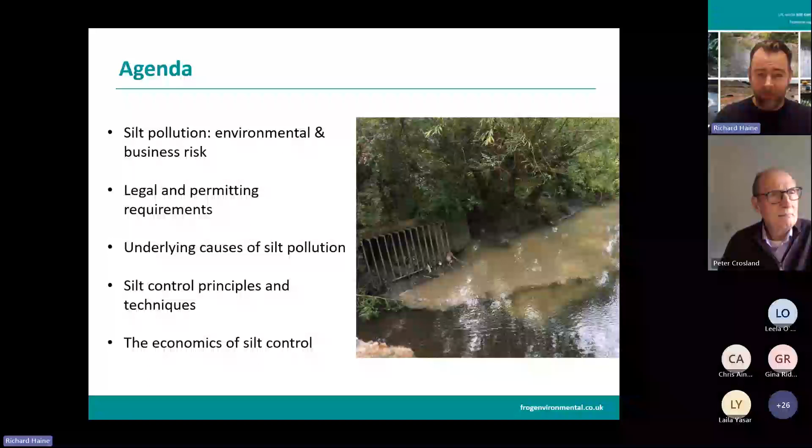So the agenda today: we'll look at some of the environmental impacts and the business risk of silt pollution, think about the legal and permitting requirements, try and get into the underlying causes of silt pollution, because getting down to the underlying cause can help us solve those problems. We'll go on to look at some principles and techniques, and we're actually going to touch on the economics of silt control as well today. Before we get going, a quick introduction about Frog Environmental.

We are silt control specialists. We design, manufacture and distribute silt control equipment, and we support many different types of businesses and contractors on site with their technical problems. We also design and deliver bubble curtains, which can be used for silt control as well, but also have a range of applications in marine and inshore environments, including things like sound attenuation.

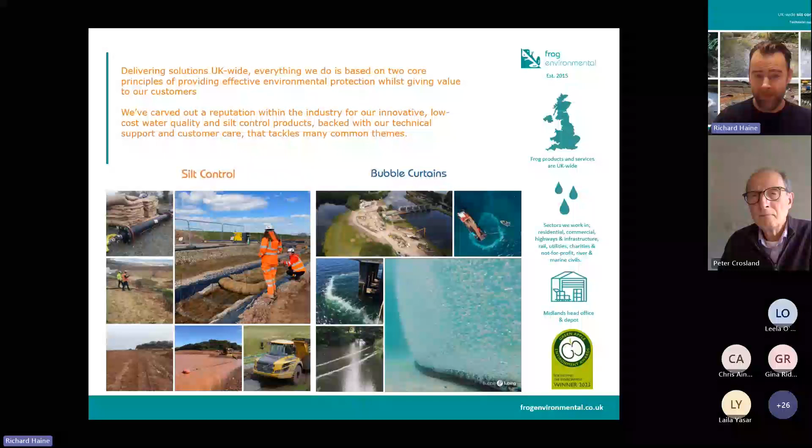A couple of key themes that we're going to touch on today. First of all, silt is a damaging pollutant to the environment. Your site needs to be ready year round, it's not just a winter problem. So we do talk about being rain ready, having a site that's ready for that summer deluge as well as the winter deluge. We do see some really bad silt pollution events happen in the summer.

Most of the silt pollution events we see on site are actually avoidable. So there is hope, but you do need good planning to get it right. And that's going to be another theme that's going to come up again and again, that planning aspect.

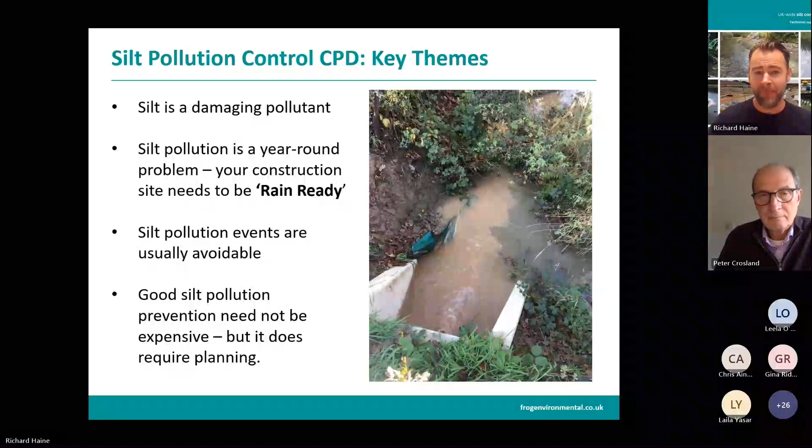So first of all, why do we need to prevent silt pollution? There's a few good reasons. First of all, we're responsible people working for responsible companies or organizations. We want to prevent environmental damage. We want to make sure our site is legally compliant, and in doing so, reduce that business risk. And also, when we're doing anything on site, ultimately we want to look for efficiencies and reduce costs as far as practicable.

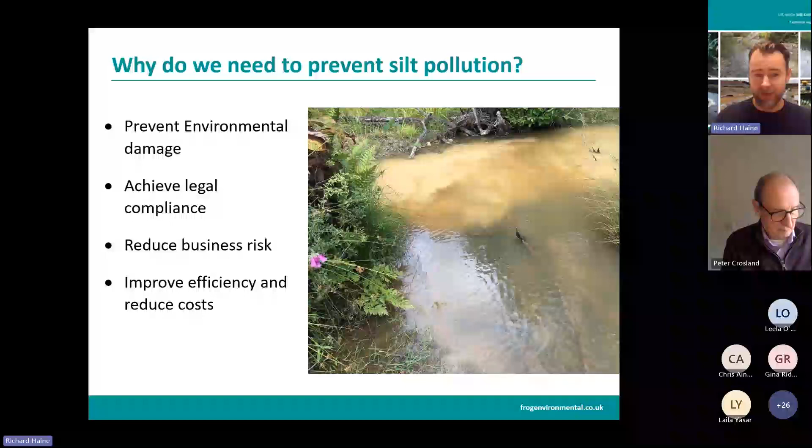Just before we get into the nuts and bolts of it, it's worth putting a definition on silt pollution, because silt is a naturally occurring part of any fluvial or river system. Obviously it's from weathering of rock, bedload transport. So when we're talking about silt pollution specifically, we're talking about silt entering a river or water body typically that shouldn't be there, from an anthropogenic source such as mining or a construction site, or indeed remobilizing silt in an unnatural way that might already be in a river system that could cause a knock-on effect downstream.

So let's look at those environmental impacts for a second. Habitat degradation is pretty well understood - large loading of silt can really reduce spawning ground for fish. It can have an impact on the aquatic food chain. It's also a vehicle for pollutants entering the water, including things like higher nutrient loads that might have more acute impacts, introducing a higher biological oxygen demand into the waterway for instance. And it could have chronic impacts as well - things you might not want in a river, like heavy metals that can end up attached to that silt.

We're also seeing it cited a lot in terms of increased flood risks, particularly where we're seeing large construction sites upstream of flood control structures.

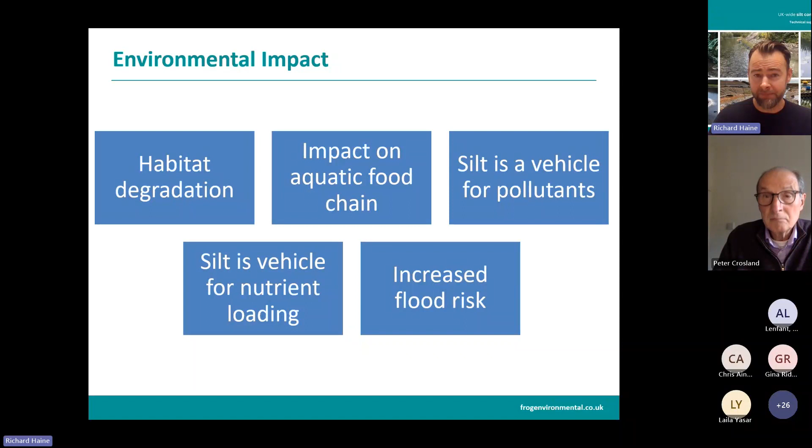Business impacts are a bit more dynamic. Certainly enforcement actions and fines is a pretty obvious one. If you do cause an incident, you're going to have to respond to it, so there's some hidden costs there as well. Those hidden costs get to the surface pretty clearly if your site is put on stop, and we do see that, unfortunately, sites stopped in their tracks. That can start getting very expensive if you need to stop working completely while you get your act together. And if you really cause a big problem, you could have cleanup costs.

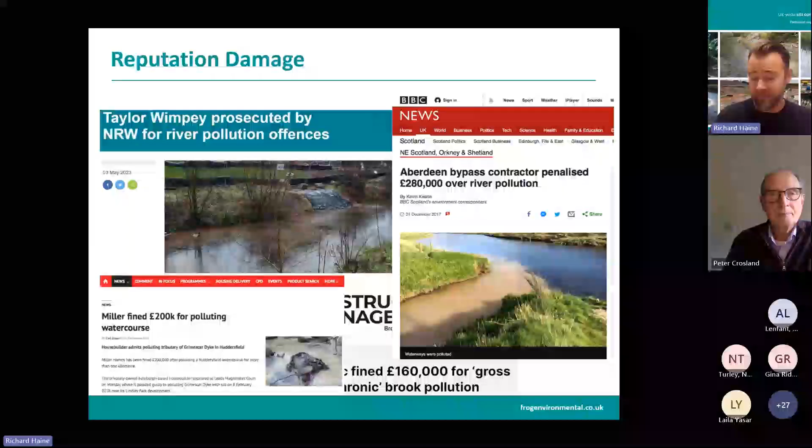Responsible people, we've got to comply with all the relevant legislation. Now there's lots of different legislation here - I'm not going to go through it all, but none of that will cite silt specifically. But if you do cause a silt pollution event, there's lots of different regulatory instruments you could be prosecuted under, including things like the Environmental Permitting Regs, the Environment Act, Freshwater Fisheries Act. It all depends on what you've damaged and how badly you've damaged it.

Bit of myth busting for you here. Something we do hear quite a lot on site is that because a site's got its plan in place, they've got their drainage design, it's all been signed off by the lead local flood authority, that they've got a permit to work, a permit to build. If you're on site anywhere 3 months - certainly in England and Wales, it's a bit different in Scotland - but if you're on site for 3 months or more, you will need a bespoke environmental permit to discharge water during your temporary works phase.

And that's perfectly logical, isn't it? Because when a scheme's finished, the actual environmental impacts, provided it's well designed and approved, are very low. But those environmental impacts during the temporary works phase are actually pretty significant when it comes to silt pollution and actually connecting a source to a receptor.

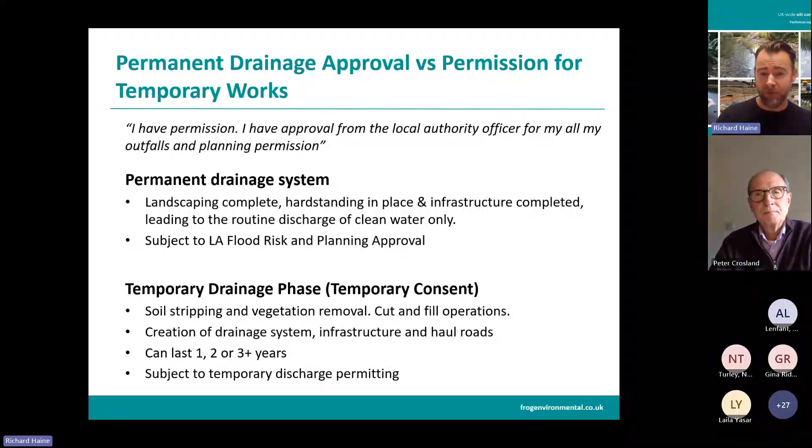There's been a consultation recently. The £250,000 cap is being removed, and that relates to the variable monetary penalties that are imposed directly. So that gives the regulators a way of fining a quicker method without having to go through those court costs, which can be very costly. Ultimately, all the regulators have got a budget that relates to being able to take people to court, but they've now got a better mechanism for fining people a bit more quickly and easily.

And we know that's going to come into play for silt pollution, because we are seeing some pretty big six-figure fines over the last 12 months.

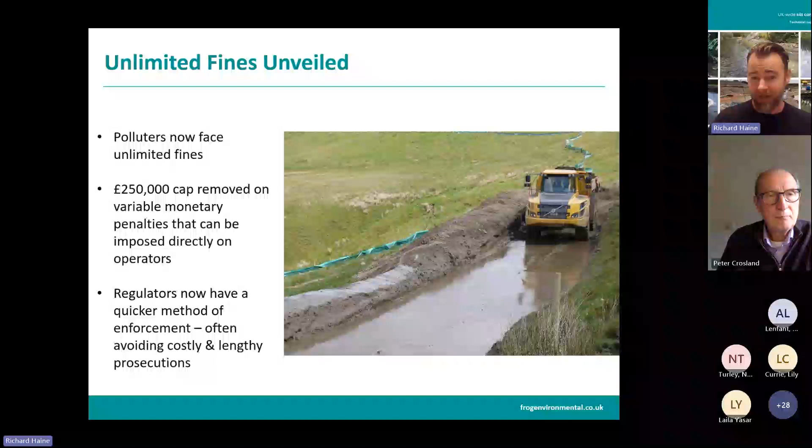And I know this is lots of information on this slide, but I think it's worth taking a step back and actually thinking about all those risks and what they are and the different drivers here. You know, we've got people who care about rivers.

Certainly, they're more in the news at the moment. Pollution has become higher profile. Probably the pandemic contributed to people enjoying the green and blue spaces on their doorstep a bit more. We see more volunteering, more citizen science taking place on rivers.

That's leading to more reporting to the regulators from members of the public. We're certainly seeing a changing regulatory attitude and legislation - more fines, more severe fines. We've got the prospect of climate change, more intensive rainfalls predicted. How's that going to impact how we manage surface water during temporary works?

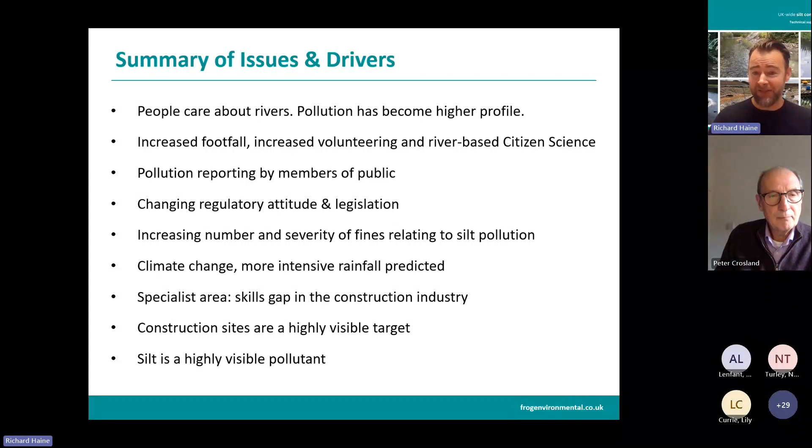There's a skills gap in the construction industry regarding silt control. It's quite a specialist area. Not many people are particularly good at it. Construction sites are also a very visible target. Adding to that, silt is a highly visible pollutant, and you've got a bit of a perfect storm there. I think ultimately that's why we're having discussions like this, CPD sessions like this, and that's kind of why it's moving up the agenda.

So we know silt causes environmental damage. We know the business risk is increasing, but we still see lots of silt pollution events happening. So from our perspective, it's worth asking why, because we do still see lots of silt pollution events. And to understand that, it's really worth thinking about those underlying causes.

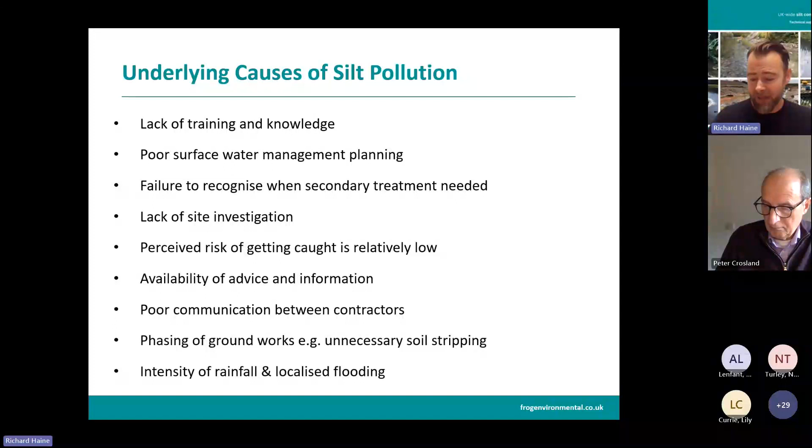And we deliver a whole module on this in our half-day training, because I think if you can get down to the underlying causes, you can come up with systematic and process-driven solutions rather than just sticking-plaster solutions. Now, I'm not going to run through these all at the moment, but I would just like to pick out a few of my favorites, if you will.

First of all, that lack of training and knowledge, that skills gap that I referred to earlier. There are people on site who don't understand that silt is a pollutant, and that's not good enough. They might understand that diesel or hydraulic oil or anything has to be stored in a certain way as a pollutant, but just getting that baseline of knowledge to everyone on site, making them understand silt is a pollutant - you need to report it, it needs to be managed.

The other aspect of this is that, from our anecdotal experience as practitioners, if we go to site to talk about silt pollution or help on a technical front, we could be talking to a project engineer, a site manager, project manager, an ecologist, various different roles, none of whom are silt control specialists. So there is a knowledge gap there.

And there's certainly different ways of approaching that. Sessions like this are really useful. More in-depth training can be done. At the other end of the scale, just a simple toolbox talk on site, perhaps, to tell people that silt's actually a pollutant, what to do, how to report it. These are all things that are going to contribute to building a slightly more resilient system.

Consider minimum standards for key roles. And I guess this comes down to the fact that this is a technical discipline in its own right. But it's not all that complex. And if you understand the principles and get that in place, then actually a lot of problems can be prevented.

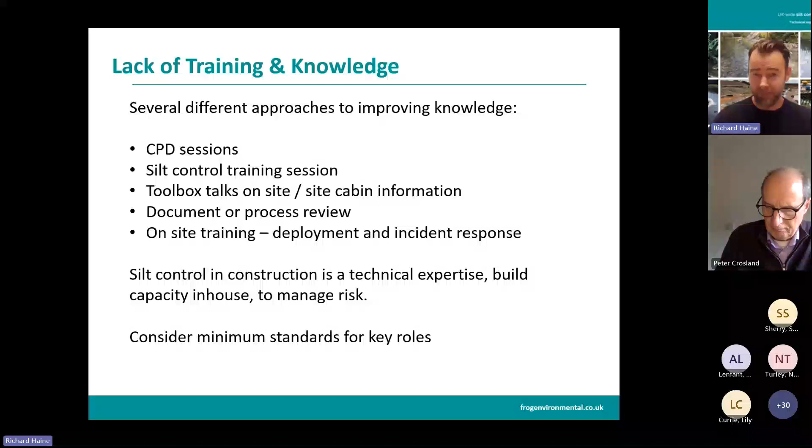There's no excuse for this anymore. If you're on a construction site anywhere in the UK for more than a few months, you're going to be dealing with surface water. And it's not acceptable to wait for something to happen, wait till you've got a notification off the regulator to actually do something about it. Pollution prevention needs to be planned, it needs to be put into a budget, it needs to be included in tenders.

There's certainly process issues here. It's not high enough up on the agenda at the moment. And I think we've got to ask ourselves as an industry, there's environmental risks, there's legal things we've got to handle, but we've got to ask ourselves if it's actually socially acceptable to be polluting a river in this day and age that people want to use for amenity value, or that's got a high biodiversity function, and it's not.

Surface water management, yeah, we do come across that too. I think the biggest issue here is we sometimes see a disconnect between the surface water management plan as it's written and what's going on site. So I guess there's a need to update that plan, evolve it.

The problem is that ultimately, if your plan doesn't represent what's going on site, then there could be pollution pathways that you're not aware of. So this is one for you environment managers out there, environmental advisors on site. Try and get this on the agenda.

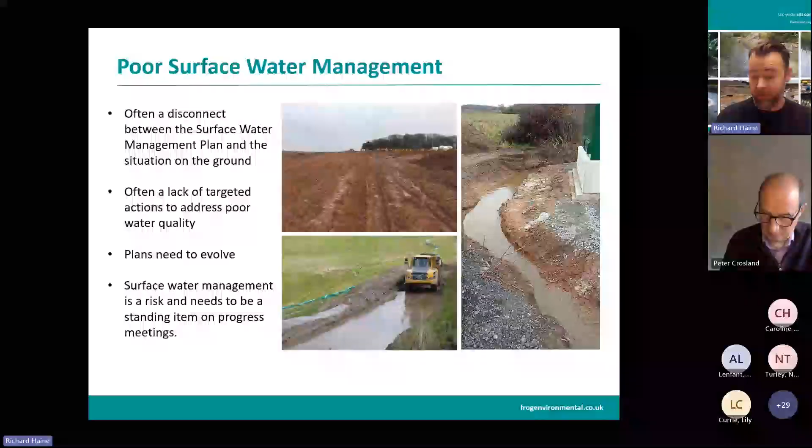One of my favourites here is the lack of site investigation we see. Often we'll go to a site, we'll see a lagoon full of water that's just a colloidal suspended silt. It's never going to settle down. I'd probably rephrase this. Sometimes it's not a lack of site investigation because the SI happens, the ground investigation happens. It's more about how that information is interpreted and aligned with the intervention strategy.

Now, I'm not a mathematician. I probably couldn't explain Stokes' law to you particularly well. I might just about be able to manage silt settlement area on a good day. But what I can do is I can take a sample of subsoil, put it in a glass or a container with water, shake it up, and see how long it takes to settle out.

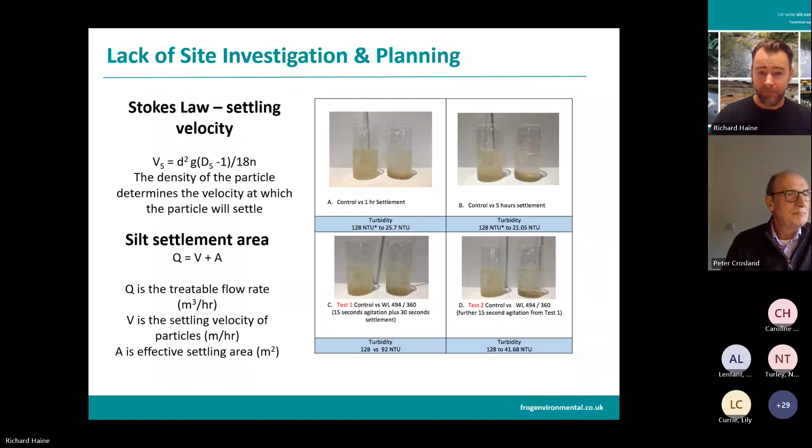And ultimately, if that's still in suspension after a few hours, you're going to need more than a hay bale and a bit of silt fence to actually solve your problems. So understanding that at a very early stage is going to help you define your intervention strategy. If you're only finding that out when you're on site, you're already up against it. And if you don't have good planning, you don't have the skills on site, and you don't really understand the site, you're going to end up with inappropriate intervention techniques, and that's going to lead directly to silt pollution.

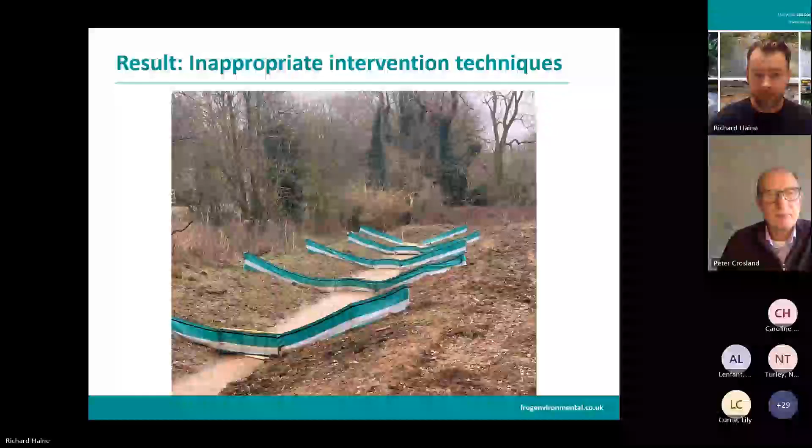So how are we going to assess risk on site? What are the main factors we look at? And this is taking aside variables like the weather, we know it's going to rain at some point, and variables like the sensitivity of your receptor. This is just thinking about physically, how is silt going to move around site? We want to be thinking about the proximity and the connectivity of your receptor, whatever that receptor is.

So that's thinking about how close you might be to a river. Are there ditches that link to that river? How is silt going to move beyond your red line? Topography, what's the nature of that subcatchment? How is it going to behave when it rains? Is that a peaky hydrograph? How fast is water going to leave site?

And also geology, coming back to that particle size again. You might have a brilliant bit of site investigation, a really, really thick report that you paid thousands of pounds for. But if you're not interpreting that information and actually using it on site, then you could be doing better.

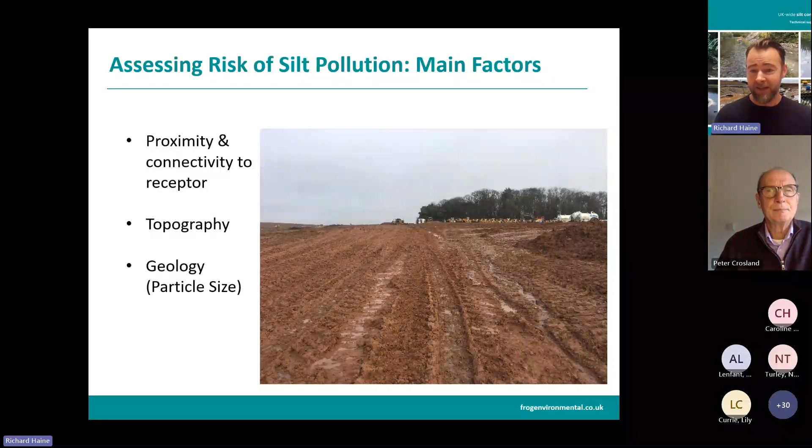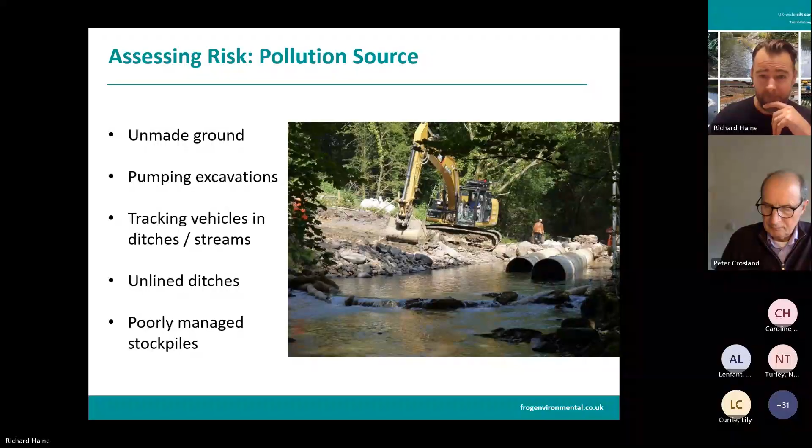So going from source to pathways, what are the main pathways? Well, typically your water is going to be carrying your suspended load off site. That could be down a drain, a surface water drain, a land drain, through a culvert, or overland flow. There's all sorts of ways that water will move off site - it'll follow the path of least resistance. But understanding where those pathways are and how they change during the course of a project is really critical.

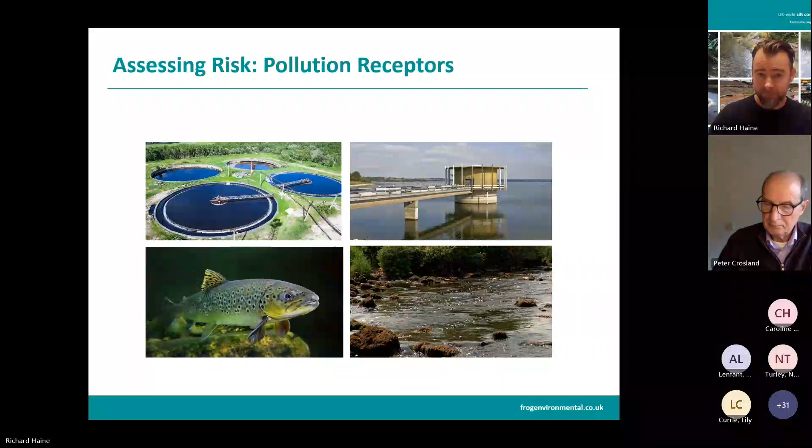And I'm thinking about receptors too. We've talked about the biosphere, potentially impacting the food chain. It's not just that though - you could be thinking about third-party assets downstream, fisheries, people or companies with abstractions that might want a certain water clarity. So don't limit your thinking to the biosphere when thinking about receptors - think about third-party assets too.

So we like to think of controlling silt as a hierarchical approach, and going back to that source again - what does source control look like on site? I think there's a parallel here with health and safety. You don't put on your PPE as a first line of defence - your PPE is there as a last line of defence. And you could see silt capture and treatment a bit like that as well. If we can eliminate a risk at source or reduce it at source, then we can typically reduce the problem.

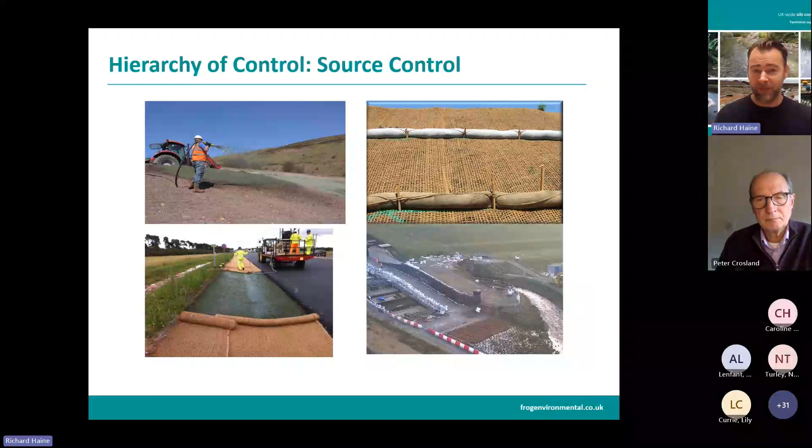So what does that look like? Well, we see a lot of scorched earth policies when ground workers want to come in and strip an entire site as quickly as possible, because economically that probably makes sense. But it's really worth giving consideration to a phased land strip, retaining vegetation buffers where you can, because that vegetation is going to be your friend - it's going to help you reduce the impact of silt pollution.

Now, I know economically that's not always practical to do. And certainly there's an interface here with ecology as well - you don't necessarily want to be leaving lots of vegetation around site, as you might get a nesting bird or something that could cause you problems down the line. So there is a balance here and different things to consider, but where you can, vegetation strips are really good, and a phased land strip can certainly help you out.

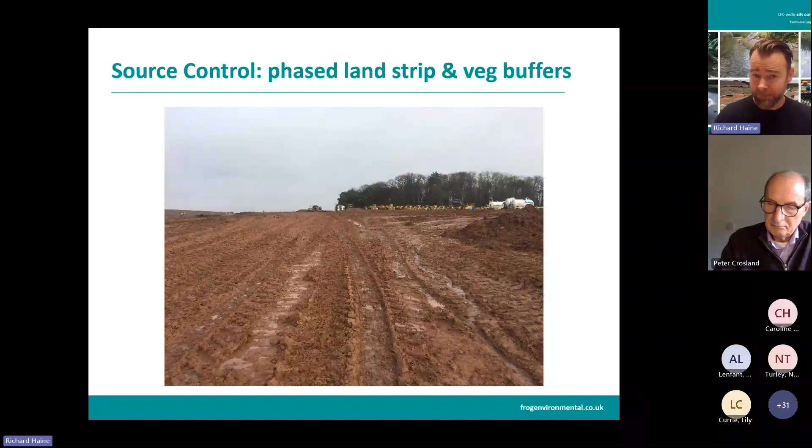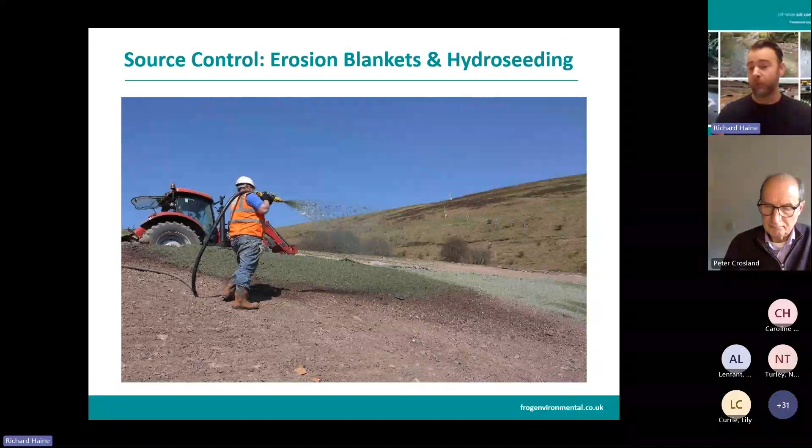Where you've had to employ a scorched earth policy and strip all your land, and you're not going to necessarily do anything with some of that land for a bit, consider reinstating it. Erosion control blankets in high risk areas, hydroseeding can be really useful. There's lots of different proprietary tools out there that you can use - if that land's going to be sat there exposed for a year or two, there could be a strong cost benefit argument for actually reinstating it rather than just letting it pollute or risk causing silt pollution for that length of time.

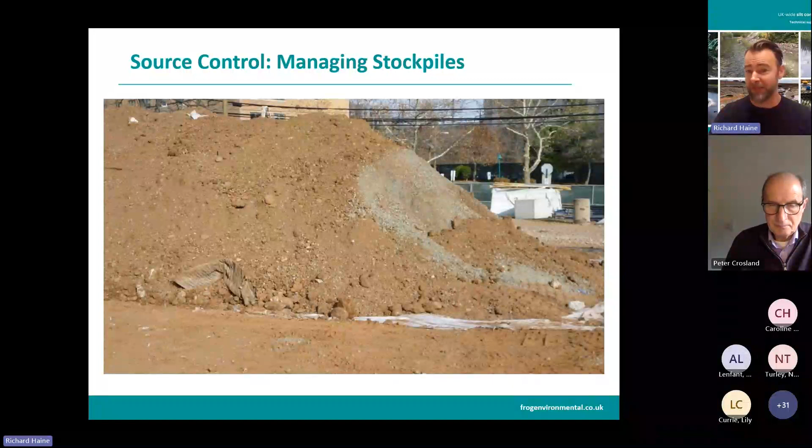Stockpile management - I alluded to the fact earlier that you need that interface between your surface water management plan and your material management plan on the site. Unmanaged stockpiles, poorly managed material on site can be a significant source of pollution too, but that's not difficult to manage at source. Just controlling the movement of that - sometimes covering stockpiles, sometimes getting a well-designed fence around it - can really help reduce pollution risk there.

We do see quite a lot of issues with temporary water crossings. We've seen quite a few fines directly relating to vehicles tracking through streams on site, causing all sorts of pollution issues downstream. Temporary water crossings is something we see not done particularly well, so much so that we've done a guidance note on it to help some of our customers. It's a simple thing, needs a bit of planning - if you get it right at the start of your project, you can really reduce a lot of silt pollution risk at the source.

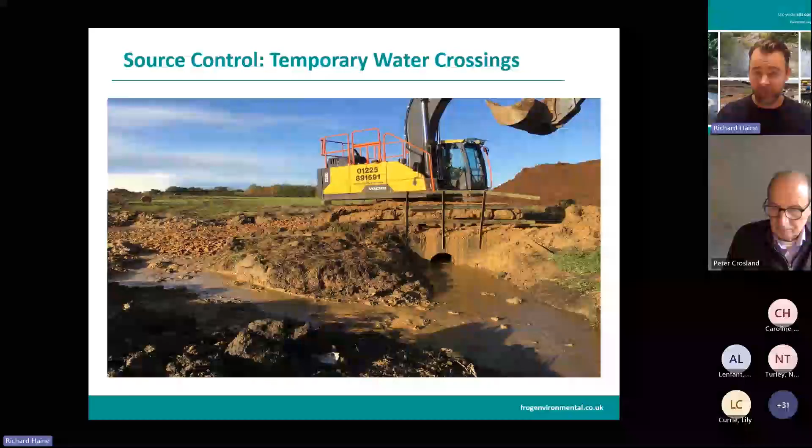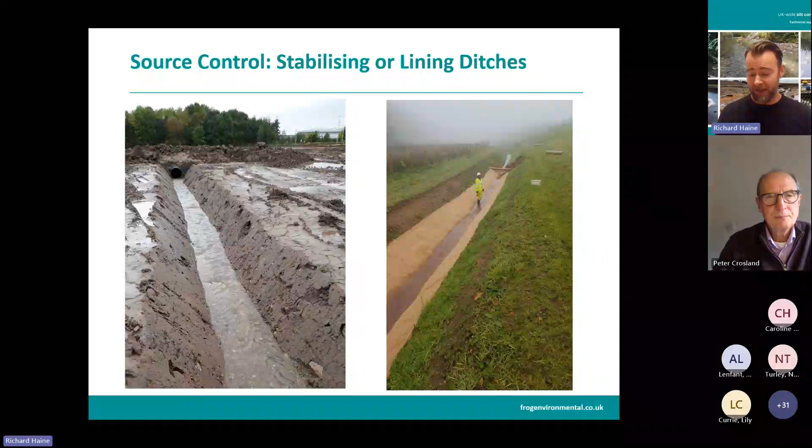Although ditches are a way of moving water around site, unfortunately, if they're not designed well, they can be a significant source of pollution. Lining ditches and stabilizing them, particularly if you're going to use those ditches to carry water over months or years, really pays dividends. We've seen terrible cases where a site's been up against it, trying to clean water and get it off site. They're cleaning water, but because they're transporting it in a muddy ditch, they're having to clean it again afterwards. That doesn't make any economic sense. It's worth investing in good ditch design, lining, and stabilization.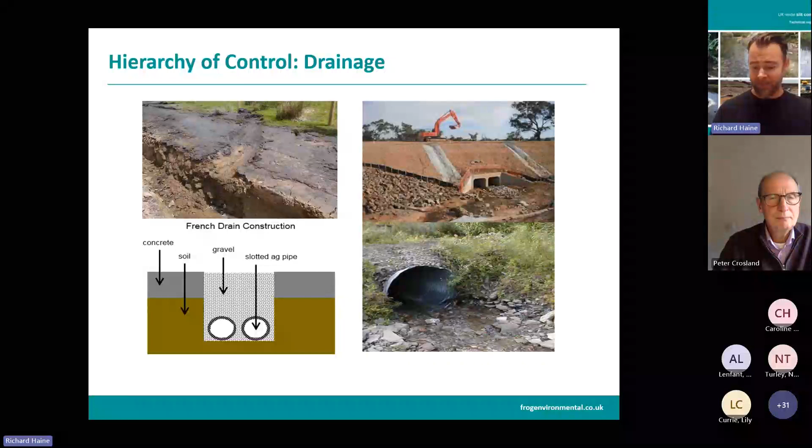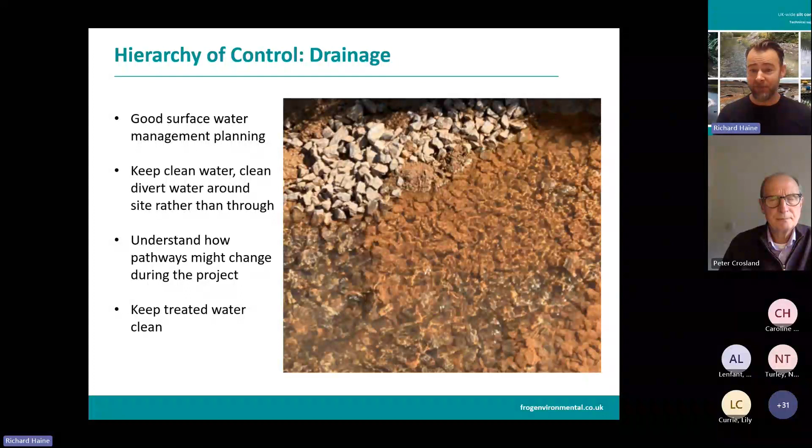If you've done everything you can to control the risk at source, let's look at drainage - that's next in the hierarchy of control. This comes down to good surface water management planning, keeping clean water clean. Quite often that might mean diverting water around your site rather than letting it come through. Think of it in terms of a pound and pence sign in front of every bit of silty water you have to treat - you'd want to minimize the amount coming onto your site. You can't put a canopy above your site to stop rain, but a well-planned approach to minimizing water coming from third-party land can save you a big headache later in the project.

Infiltration is really useful where you've got ground that will infiltrate. Having earth bunds to support infiltration in appropriate places can play a really useful part in your drainage strategy. Equally, over fields and green areas where water can infiltrate, that's a useful thing to have if you've got permission to use it.

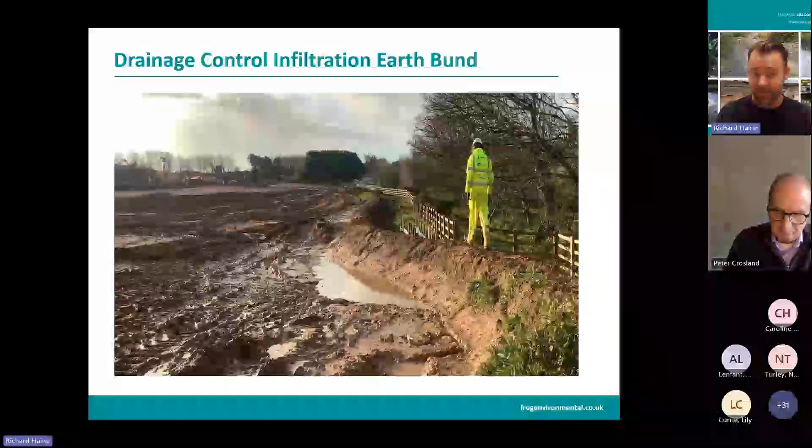Attenuation design is absolutely critical, and there are a couple of different angles here. With attenuation design, you've got a maximum flow rate you can release off site, so a lot of the attenuation is designed according to LLFA requirements. But your attenuation design can also play a critical role in silt control and water quality - there's a water quantity function and a water quality function here. Good attenuation design isn't just about keeping that water back, it's about working out how you can use that pond to maximize retention of silt and keep it from going off site.

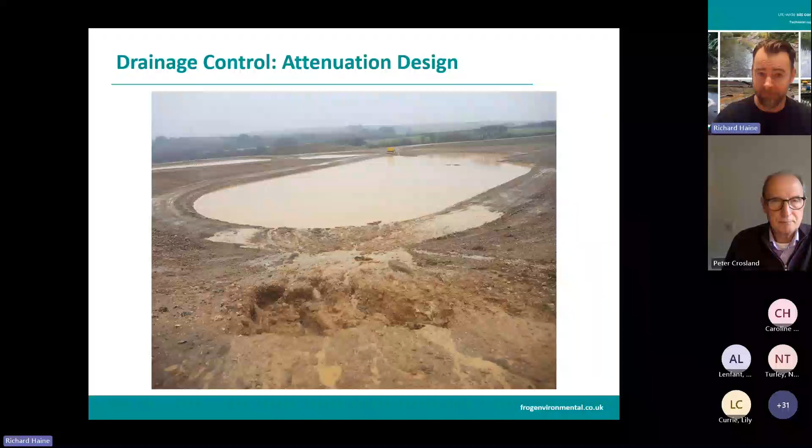If you're pumping or having to pump out ditches, areas, or ponds, pumping technique is really important. Having a floating pump head so you're drawing from the surface, rather than from the depths where you'd be pumping out sludge and letting that travel around site - finding some way of protecting that pump head is really key.

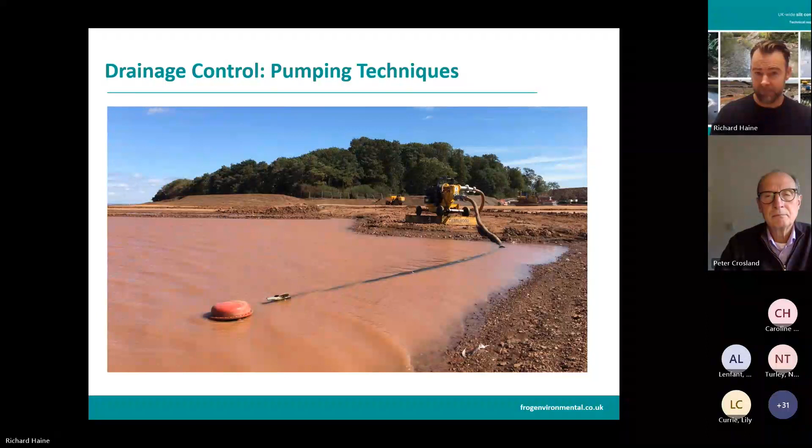I want to come back and talk about ditches again, because stabilizing or lining them is really important. It's worth reiterating that a ditch on site can be your best friend or worst enemy. If you treat it well - design it well, line it, vegetate it - you can use it to actually capture silt, which can play a significant role in reducing your pollution risk. If you treat it badly, it's going to be your worst enemy, continuing as a source of pollution throughout your project. Due investment in ditch design and stabilizing early on, particularly if they'll be in place for a long time, will pay dividends later in your project.

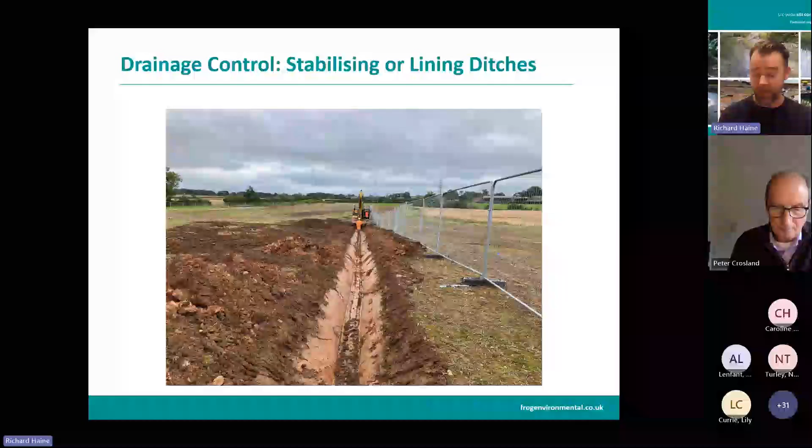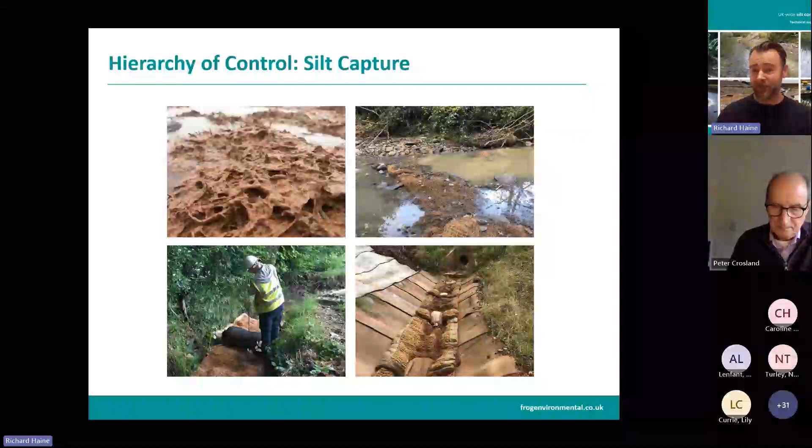So if we've done everything we can to control risk at source, and looked at how we can manage drainage, next down the hierarchy is actually silt capture - how do we capture that silt and keep it on site?

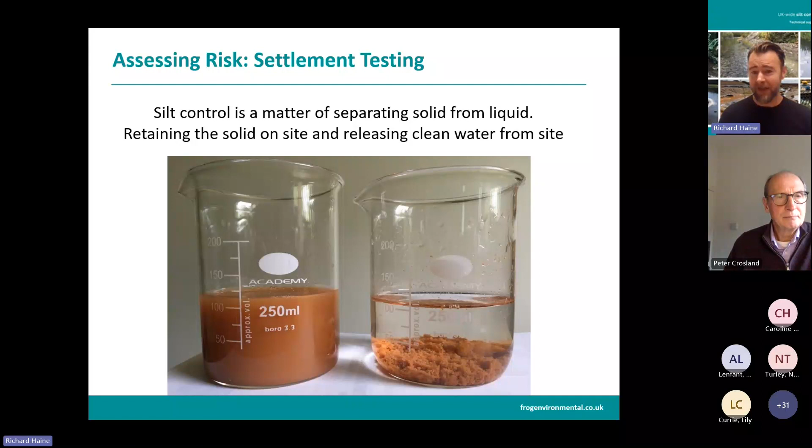Before we get into that, I want to take a step back and think about what we're trying to do. If we're asking any technique, proprietary product, or tool to control silt for us, what are we asking it to do? We're asking it to separate water from solid. We want to keep that solid back, and release the water from site - clean water, preferably, or a permissibly dirty level of water, depending on what your permit says. That's all we're doing here. Let's keep that in mind as we look through some of these solutions.

Now, why is that sometimes easier said than done? Why can't we hold that silt back very easily sometimes? And it comes back to our friend particle size.

If you've got very, very small particles, some of these might be 0.2 to 20 microns, absolutely tiny, they're going to stay in suspension indefinitely. Even in lab conditions, it's difficult to get them to settle out. So imagine trying to get them to settle in a treatment lagoon, where you've got inputs of energy from water or wind. They're never going to settle down. That's a big problem for a lot of sites we come across.

Try to visualize yourself next to a flowing stream. If you throw in a bit of gravel, it's going to land by your feet. Throw in some coarse sand, it'll travel a bit further, then fine sand will travel further still. Put in some clay, it's going to travel indefinitely. So the smaller the particle, the less energy it takes to mobilize it and keep it mobilized. That's why understanding your particle size is one of the most important things you can do early on in a project.

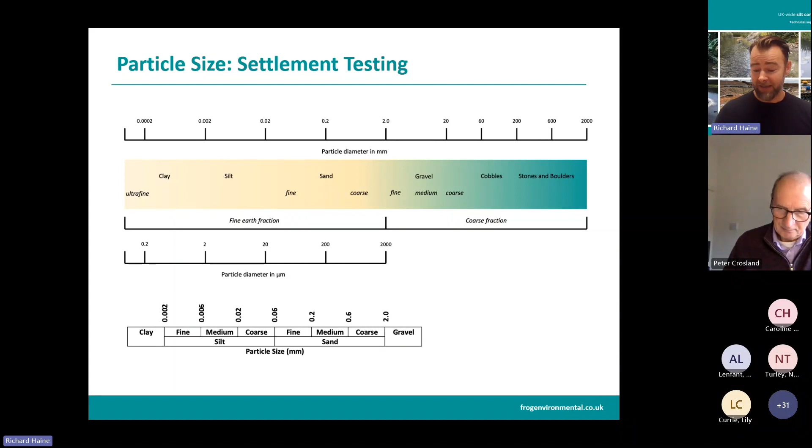Where you've got really small particles, we use a technique called flocculation. With flocculation, we introduce an element into the water that can bind those particles together. You've got millions of particles all swimming around. If we introduce a flocculant, we can bind them together, make them into bigger particles or flocs. They become energy limited, then they fall out of suspension. That's all we're doing with flocculation.

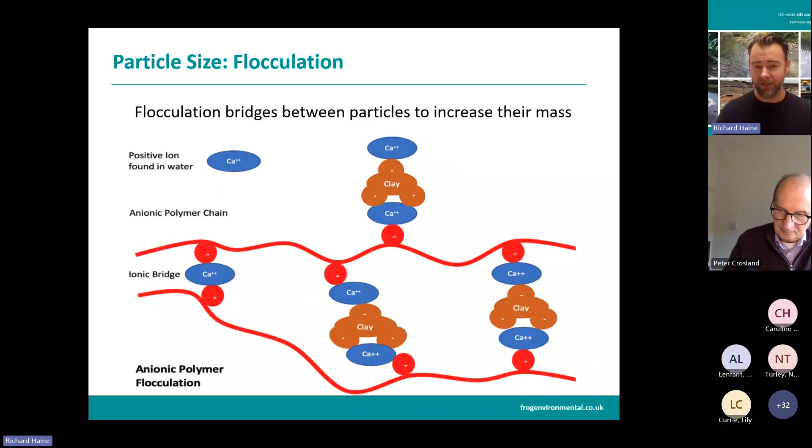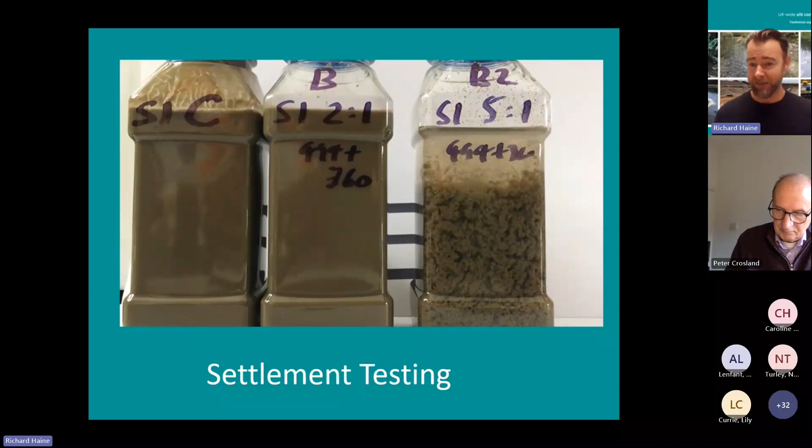I'll give you an example of this. What you can see here is some nice clay samples from the site. We've added a flocculant to that sample. You can see settling, those particles are big, and now they're sitting down, separating the solid from the liquid, so that you can ultimately discharge that clean water and keep that solid on site.

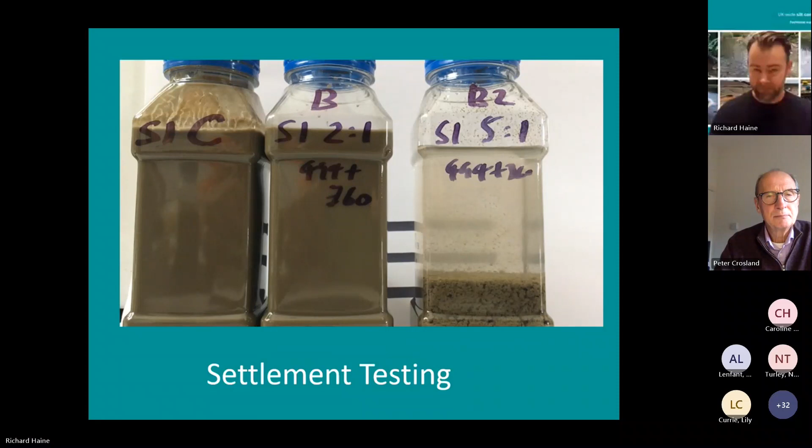I'd like to give you a couple of takeaways about flocculants before we move on. You do need a permit before you use a flocculant or coagulant on site, and the fallback position of regulators, the EA, NRW, SEPA, NIEA, is that you don't use one. That's because some types of flocculant are ecotoxic and could cause a problem. So if you have a problem site with clays, don't go online and buy a flocculant. Engage with a specialist, make sure you're getting the right product and that there's due diligence around that supply.

Understanding that settlement characteristic informs the control strategy. There's a straight line, real alignment between how that particle behaves, how you can drop it out of suspension, and what your pollution control strategy looks like on site.

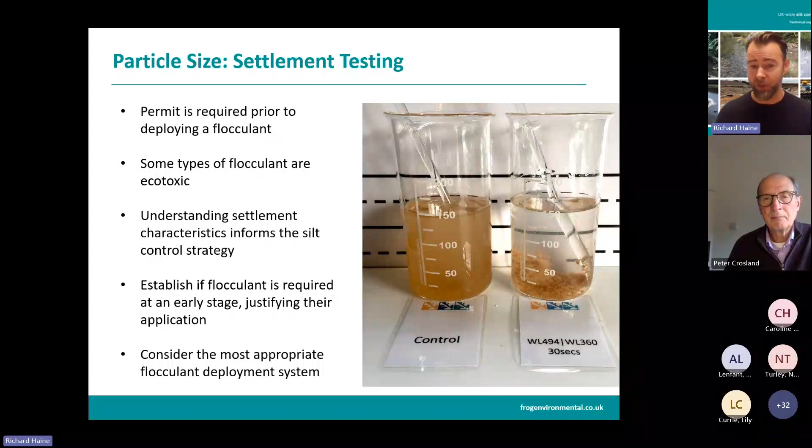Permitting is an issue here, because at the moment if you want to apply for a bespoke permit, particularly through the EA, you're waiting months and months. You need to understand if you need a flocculant early on, when you're applying for that permit, so you can introduce that at the permitting stage. You don't want to be on site finding out you've got an issue, finding out you need a flocculant, then having to adjust your permit. So again, it comes back to the planning side of things.

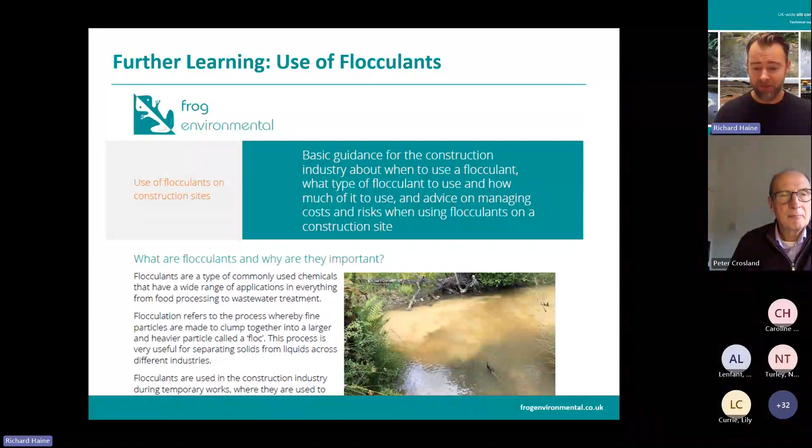So let's look at a few different techniques that are commonly used on construction sites. Silt fence to start with, the old classic. It's cheap and cheerful, and it can be really useful if it's deployed correctly and maintained correctly. The problem we see with silt fence is that it's not deployed correctly and it's not maintained correctly. Where it's good, it's really good. Think about what's going on there: it's breaking up the energy, reducing the energy.

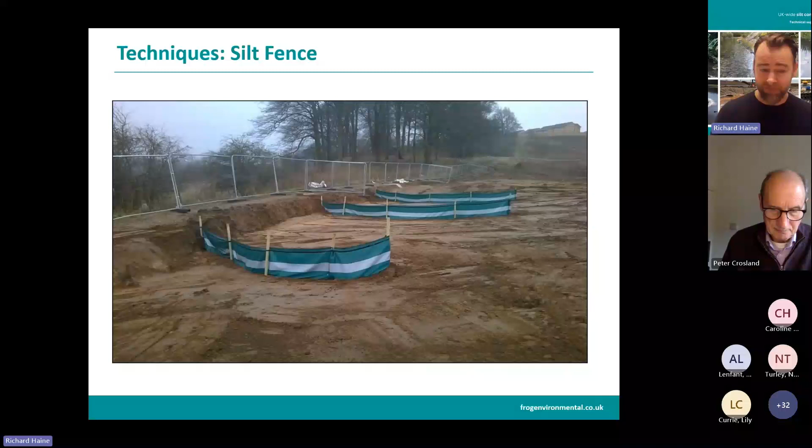It's reducing the energy of that sheet flow, which means the water's got less erosive power to pick up those particles. It's helping particles settle behind that silt fence. So technically, it's got a really good function, but it needs to be used properly. We'd really advise, if you're using silt fence, get it trenched in and make sure you've got a maintenance and monitoring plan as well.

Rock checks are used quite a lot in ditches, so clean stone. We see this as a really useful function in all sorts of ways. It's reducing that energy, reducing the erosive force of the water, having clean stone in there, quite often used in combination with Floc Mats or Silt Mats. If you've got an extensive drainage system and plenty of stone on site, it can be a really good way of reducing the water, giving a bit of a filtration function as well.

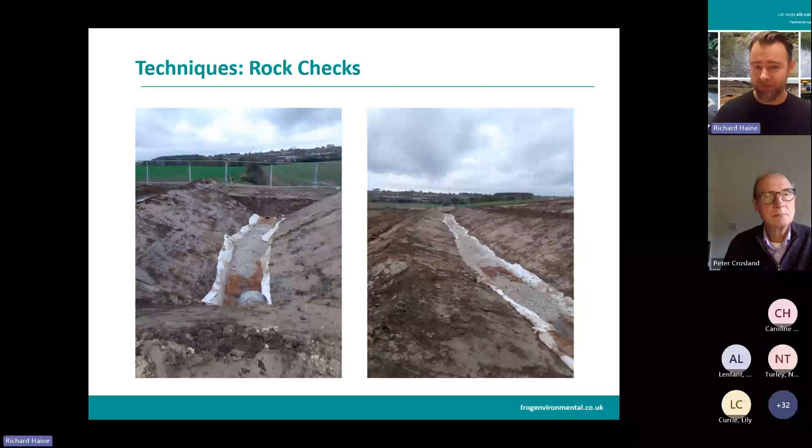Hay bales, because we do still see hay bales used on site. I think a hay bale is a really good way of transporting hay efficiently from A to B. It's not a really efficient way of controlling silt on site.

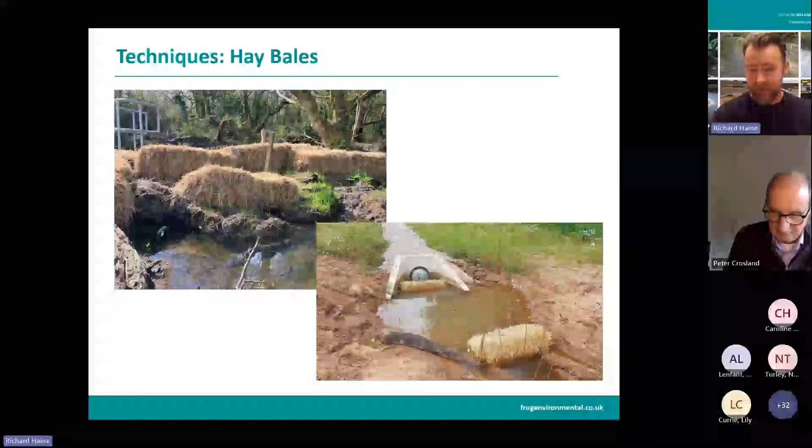So I'd say that it's a big indicator. If you're still using hay bales on site frequently, it's an indication that you probably need to up your game a bit, because they're not really fit for purpose. A hay bale lined in geotextile is also still a hay bale. So yeah, it's good to move your game on, and there's lots of different ways of controlling silt other than hay bales.

Silt wattles are really useful, silt sausages too - anywhere you can reduce the flow of water and trap silt behind a product like that, you can reduce the energy and control silt pollution. Silt wattles can be used alongside things like Silt Mats and Floc Mats as well. So you've got water hitting that product, the silt dropping down behind it, you're reducing the energy, reducing the flow, and trapping that silt on another product.

Floc Mats and Silt Mats are used a lot on site. Floc Mats have got a treatment function, so they release an anionic flocculant as the water passes that flocculates particles, which are then captured further downstream through silt mats. It's a really common technique we see used on a lot of different sites, but it's important that the Floc Mats go upstream - they contain a flocculant - and the silt mats go downstream, because the silt mats are designed specifically to hold on to those particles, even in pulse flows.

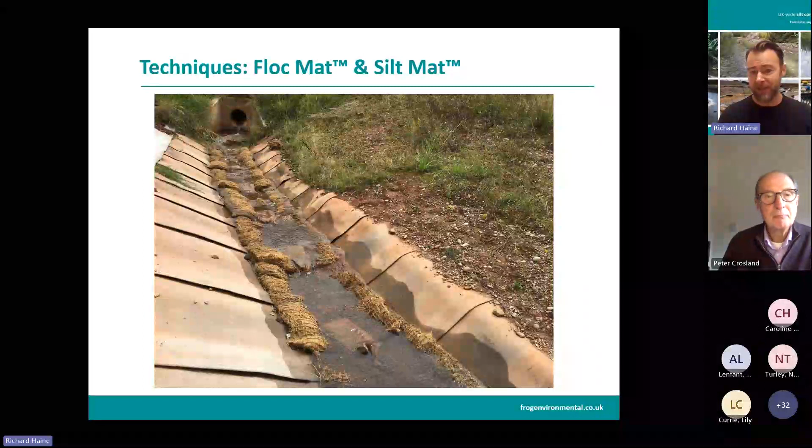Another technique on site, which we're not entirely sure about - filter socks and bags can be useful on site. Unfortunately, we do see problems with them too. The issue is that if they're not used to the manufacturer's instructions, that's typically going to cause a problem. Each of these products will have a maximum flow per area of fabric, and a minimum particle size that it can hold on to.

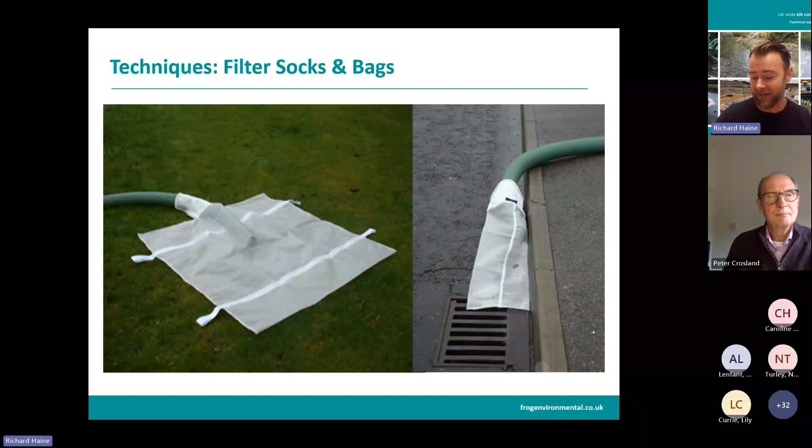The problem you get with these is someone looks at it and thinks, right, I'm going to stick it on the end of a pipe and it's going to solve my problems. That means we do get to a lot of sites where we see big holes blown in the sides of these bags and silty water pouring out. Now, that's not the manufacturer's fault - the product itself is perfectly good. It's what we're actually asking that product to do on site that's the problem - not understanding the technical limitations of it.

Another example - this is a good product, absolutely brilliant in its own right, but is it being used correctly here? Definitely not. There's absolutely nothing wrong with that product in its own right - the manufacturer manufactures it to a certain specification to do a certain job. Again, there's a disjoint between the specification of the product and what we're purchasing, what our expectations are that it can do. And again, this comes down to particle size - you're not going to be able to capture clays at any kind of decent flow rate with products like this.

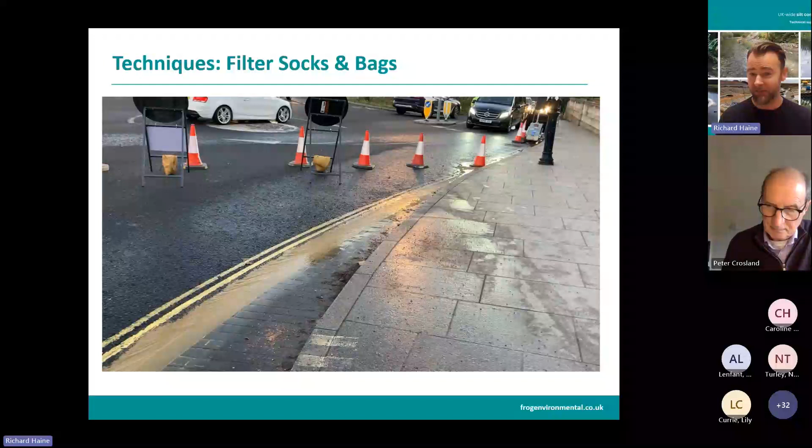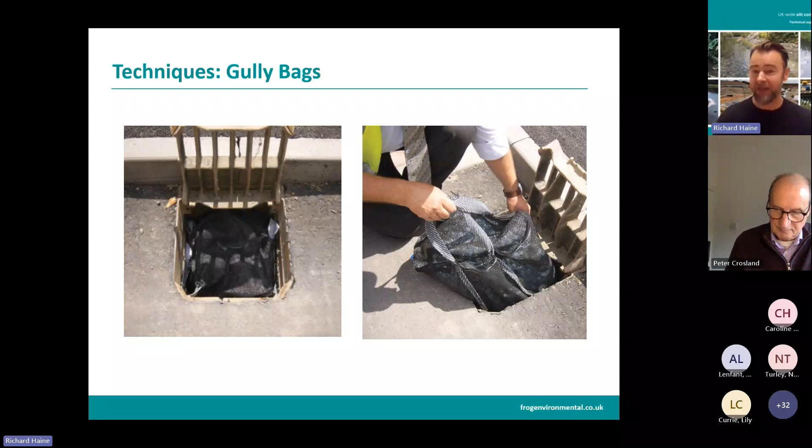Gully bags, for another one - I would be wary again. They're really good for collecting debris and larger particle sizes, but just sticking something down a drain and thinking it's going to solve all your problems - it's not. There's again lots of really good proprietary products on the market. They've got a function, they're really useful, but we need to draw that connection between the specification of the product, its technical limitations, and what we're actually asking it to do. And that's where there's a disjoint here, certainly.

I'm sure many of you here are familiar with treatment tanks. Treatment tanks are really, really useful. There's, I think, 5 or 6 really good companies in the UK now supplying technical services around treatment tanks.

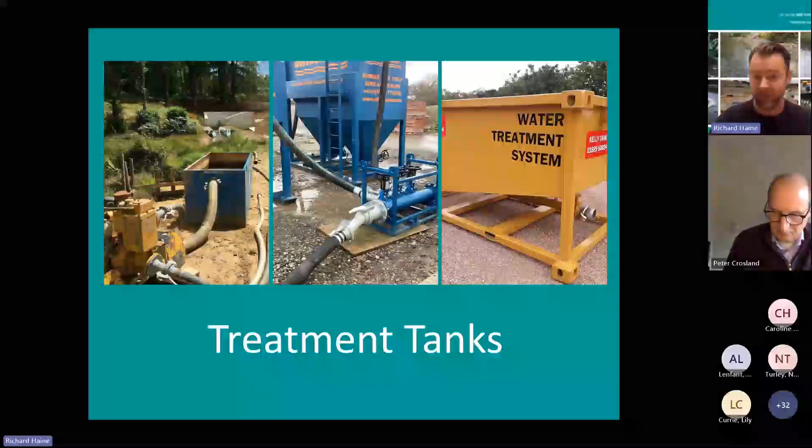Treatment tanks work by increasing the effective surface area of the particle, so you can capture more particles in a more condensed space. Typically we see treatment tanks used on sites with a small footprint, where there's no real room for lagoons or much attenuation. That's when treatment tanks can really come into their own, because of the treatment they can provide in a very small footprint. They do use coagulation or flocculation, sometimes buffering solution as well.

So often treatment tanks become a 2 or 3 stage process. You might have a dosage area, a settlement area, and depending on the type of coagulant used, you might also have pH adjustment before that water is discharged.

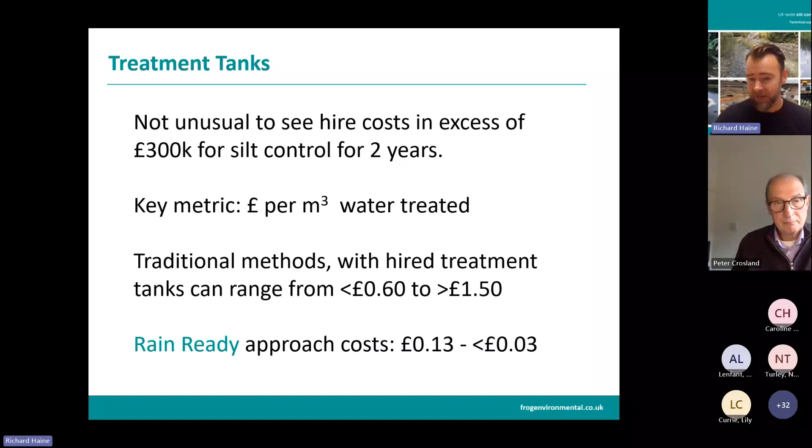One of the downsides of treatment tanks is the cost. It's not unusual to see costs in excess of a few hundred thousand pounds for a couple of years of work. The key metric is how much it's going to cost per cubic meter of water treated, and with traditional hired treatment tanks that can range from 50, 60p to beyond £1.50 a cubic meter. That's why we advocate more of a rain-ready approach on site, which can significantly reduce the costs and carbon footprint of silt control.

So a rain-ready philosophy, what's that? It's getting a system in place early. It's understanding the site, getting good planning, and making sure your site is ready year-round for any problem that might hit it.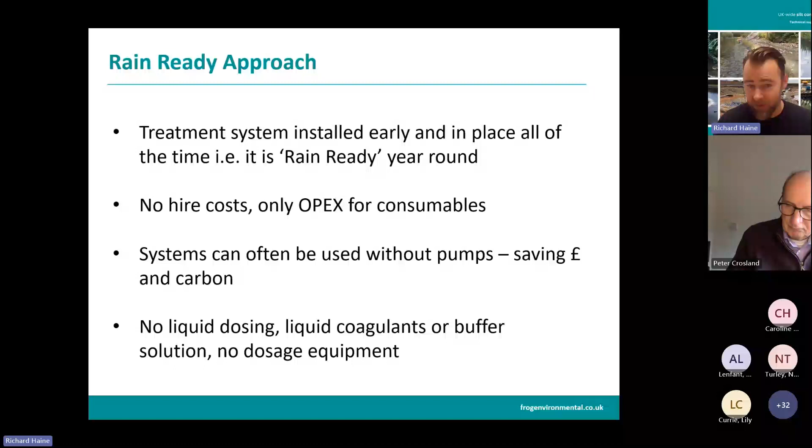There's no hire cost associated with a rain-ready approach, only operational expenditure for consumables. It does give the opportunity to reduce the need for pumps on sites, so there can be cost and carbon savings there. Rain-ready typically doesn't have liquid dosing, liquid coagulants, buffer solutions, or dosage equipment.

So how do we do that? We use something called a gel flocculant. This is becoming more and more common in the construction industry. These are very slow dissolving, stable 2 kilogram blocks, and they can be deployed on site to actually treat muddy water and get it settled out in the right place.

Some of the key characteristics: it activates on contact with water but deactivates when there's no flow. They've got very slow degradation rates, so in pump systems they can last as little as 30 days, but in passive systems used intermittently they can last over 180 days. It's environmentally safe, cited on numerous permits across the UK, and recognised as a controlled dose.

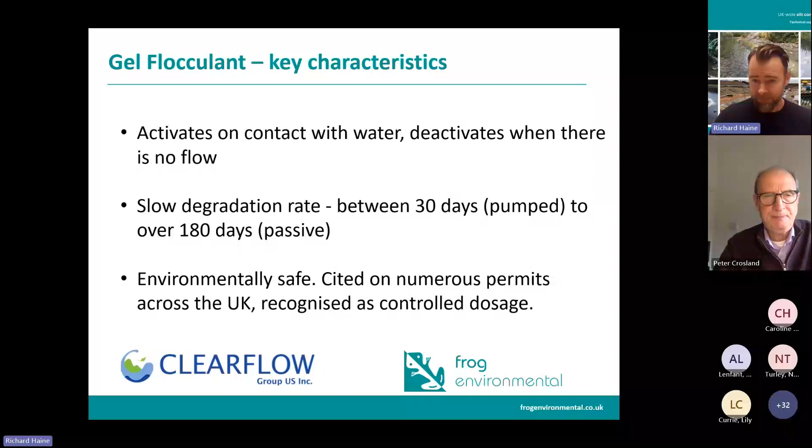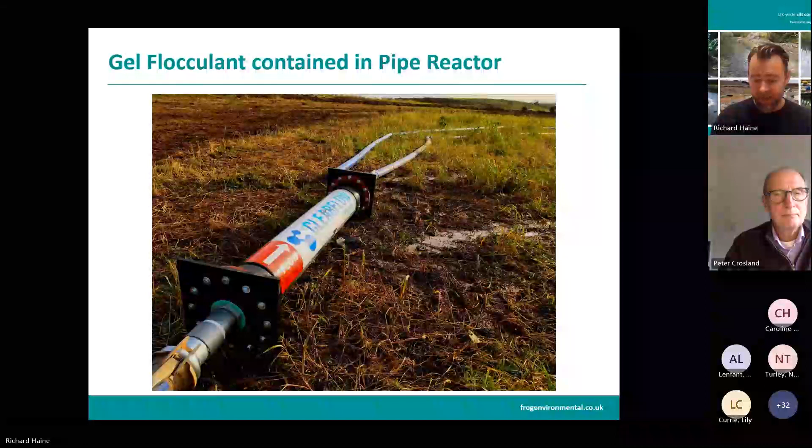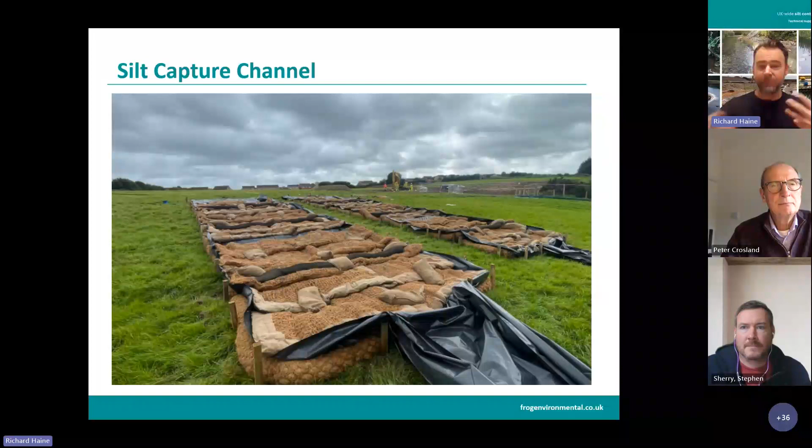Downstream we're putting things like silt capture channels or basins, or ultimately any area where you can reduce the energy. Remember the principles here: we've got water coming out of a pipe at high speed, we want to reduce the energy, reduce that flow rate, and provide media for those flocculated particles to actually be captured.

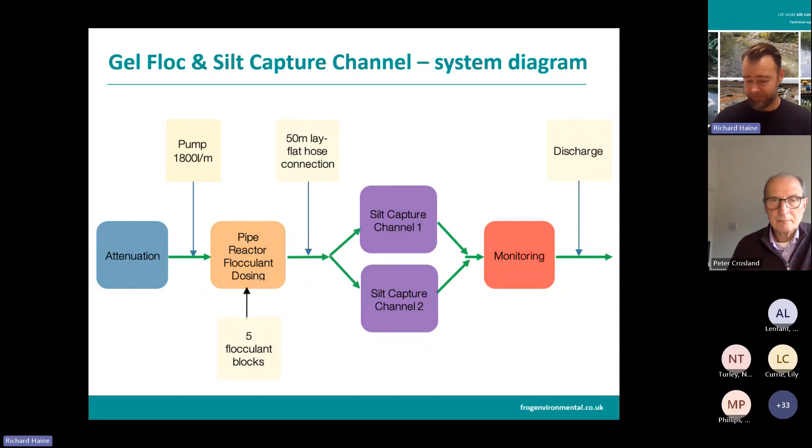So a system diagram of that would look at attenuation, a pump, a pipe reactor, the option of 1 or 2 silt capture channels before your monitoring point and discharge. That's a system that was actually used to great effect in the Lake District quite recently - the project wrapped up recently, but it's been used there for the last 5 years. That was taking NTU down from 3,000 down to about 29.

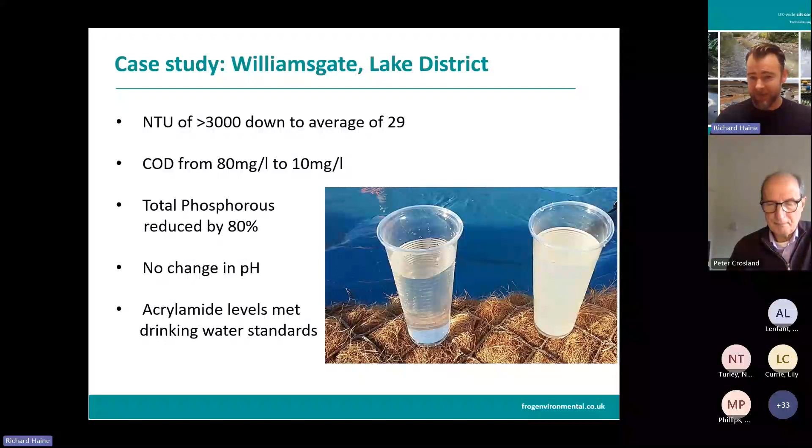Really good performance. But the interesting thing was that it was also taking the chemical oxygen demand right down, reducing the phosphorus without any change to pH, and no peaks of acrylamide beyond drinking water standards, obviously from the polyacrylamide block. You can imagine working in the Lake District, there's quite a rigorous stakeholder group overseeing this kind of thing, so environmental sensitivity was an absolute key point. Advance JV - we're very happy with that as well.

It meant they could keep working, ultimately keep discharging water. The interesting thing here of using this kind of approach is the cost saving overall.

Having 2 pipe reactors and 2 silt capture channels on site and using a gel flocculant system meant that they spent about £40,000 or £50,000 over the course of 5 years. Not a huge amount of money, but if they'd had to have 2 hire systems in place with 2 or

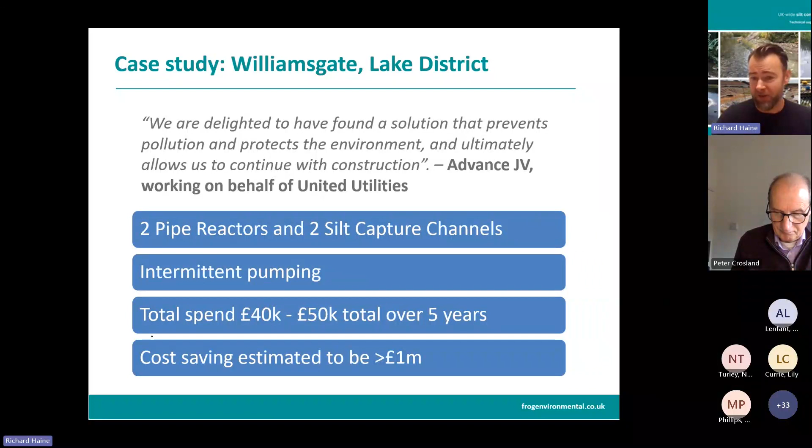3 stage treatment, they'd have been looking at costs well into 7 figures for that period. So I think it's useful to look at that, because ultimately we do have to look at our costs. The state of the economy at the moment, there's a big pressure to reduce costs, and silt pollution, managing silt pollution, particularly in the construction industry, is an area that is ripe for innovation.

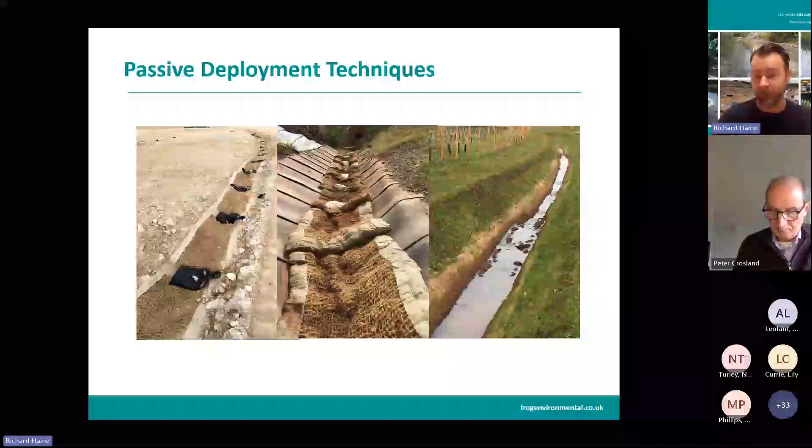Now this gets really interesting, where you can actually remove the pump as well, because if you can use the flow of water flowing off your site to actually create treatment ditches and treatment areas, then actually you can use passive deployment techniques, and you can completely reduce the energy out of your silt pollution control.

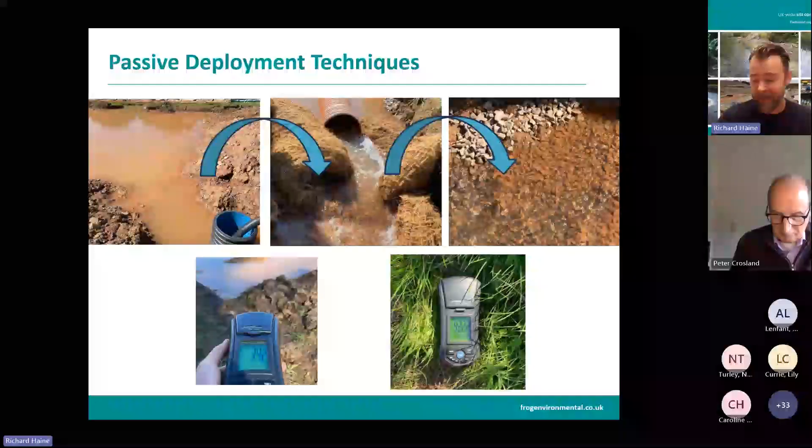We've done this on a number of sites now, and early engagement is quite useful, because that can help us look at deployment areas, what ditches to use. But it's a very good technique, and ultimately I think it's the only technique I'm aware of that can actually reduce the impact of clays on site without using any energy or power.

The real advantage there is if you can reduce a pump from site, then you are saving money. Probably somewhere between £15,000 and £20,000 a year if you can remove a pump on site, including fuel costs, which are more significant. At the same time, you can save 10 tons of CO2 over the year, which I'm reliably informed by our sustainability specialist. That's about the same carbon emissions to heat 4 homes for a year.

Now, the efficacy of actually using passive deployment techniques is different from site to site. So if you've got a tiny footprint and not much space to move and not much treatment area, then yeah, it's probably going to be more suitable for a silt tank type system. Whereas if you've got extensive drainage, you've got some topography there to work with, then that might mean the site's open to be able to actually use passive deployment techniques, which can save a lot of money and a lot of carbon.

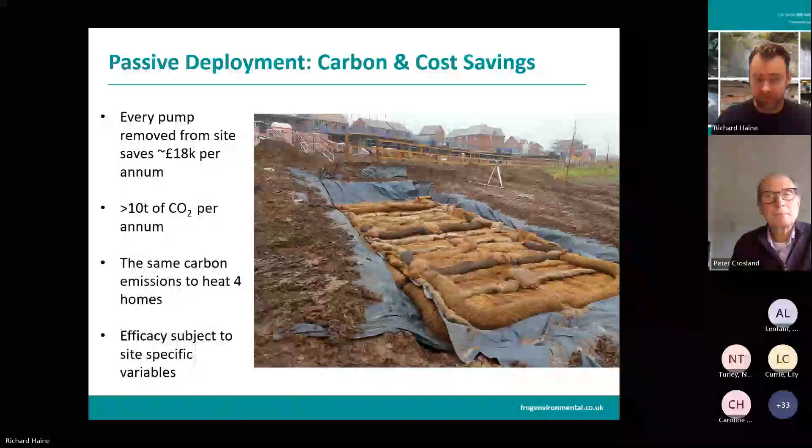And more sites are using these just to ultimately be empowered, have that data to make sure that they are not polluting from site. One thing I'd say about monitoring, particularly quantitative monitoring, is that your data is only as good as the person looking at it and interpreting it and acting on it. So make sure you've got that management system to actually back up that monitoring as well.

Make sure there's a written procedure there. Make sure you've got a threshold that you're working to. So yeah, that's important. Monitoring in general is very important because it's going to save you from having a pollution incident, actually keeping an eye on what's going on site.

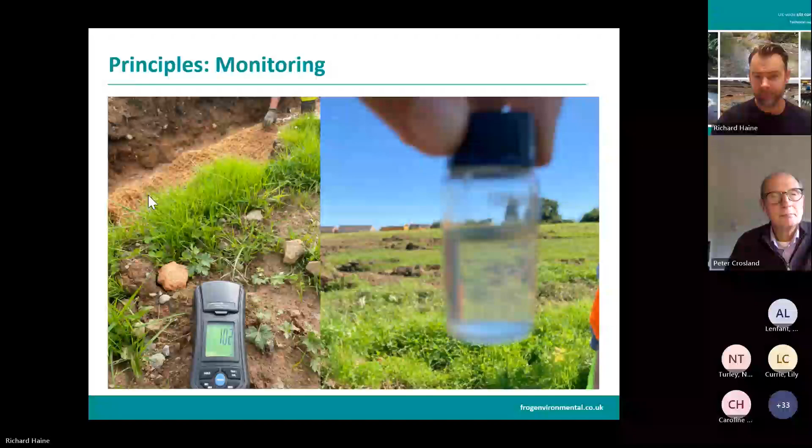I want to just dial back to what we said we want a silt pollution solution to do for us. We want it to hold back solids, and we want to discharge clean water, or permissibly clean water. So it doesn't matter what you're using to do this. If you're using a silt tank, a capture channel, a bag, a silt wattle, a silt mat, whatever you're using,

a lagoon, it's going to accrete silt. Silt's going to accumulate in it. That's the job that it's doing. So as far as I'm aware, there's nothing on the market that will teleport that silt to a different dimension.

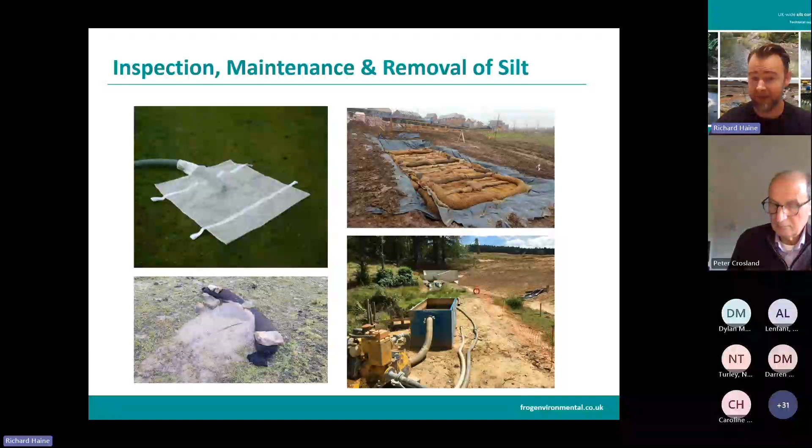So that means you're definitely going to have to bring in a maintenance plan to make sure that that product, if it's a proprietary product or whatever it is, is going to still do its job. That's going to mean emptying it of silt, making sure it's still working, having a regular inspection plan. And again, this comes back to your planning and your environmental management systems on site. There's no point in putting a good plan in place and it being great for the first month and then it going downhill. It takes effort, it takes maintenance, and it's going to take some resources to get this right.

So a couple of summary points to take away. First of all, silt pollution is an environmental risk. We know the damage it can cause, but we're also seeing the business risk increase measurably over the last few years. Our view as practitioners is that the construction industry can do better and should be doing better at the moment.

There's multiple underlying reasons for silt pollution incidents happening. Understanding those underlying reasons can actually give the opportunity to fix things in a more process-driven, systematic way, and that's going to reduce the reactivity, the sticking plaster approach. So looking at those processes, asking the right questions at the right time, thinking about settlement testing, particle sizes, and introducing flocculants into your permit application if necessary.

And that planning is really going to reduce your risk. It's going to save you money, it's going to deliver efficiencies, and it's going to deliver you a carbon saving too, hopefully.

Communication is really important. Developing a baseline of knowledge for all staff is really useful, from the toolbox talks to CPD sessions to half-day training sessions. Actually, just raising that bar of knowledge is a critical component to getting this right. And there's definitely a skills gap in the industry with regards to managing silt pollution.

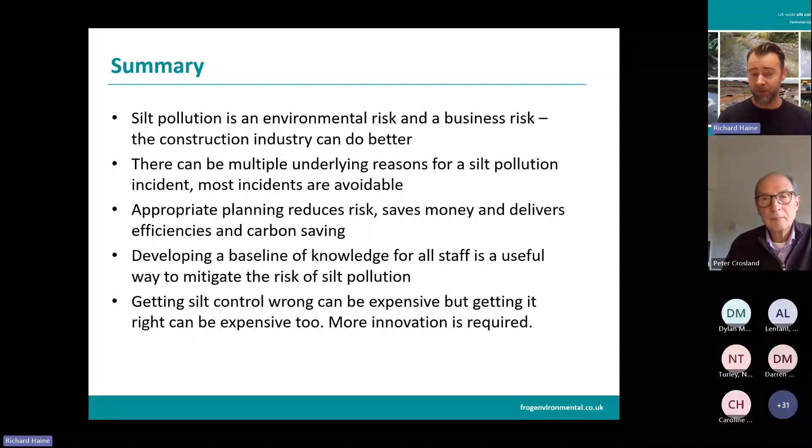So that was my last slide. Thanks very much for joining for this one.